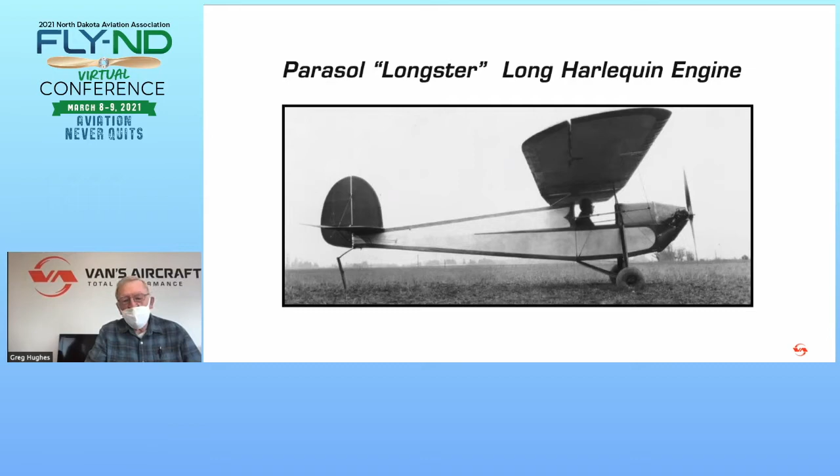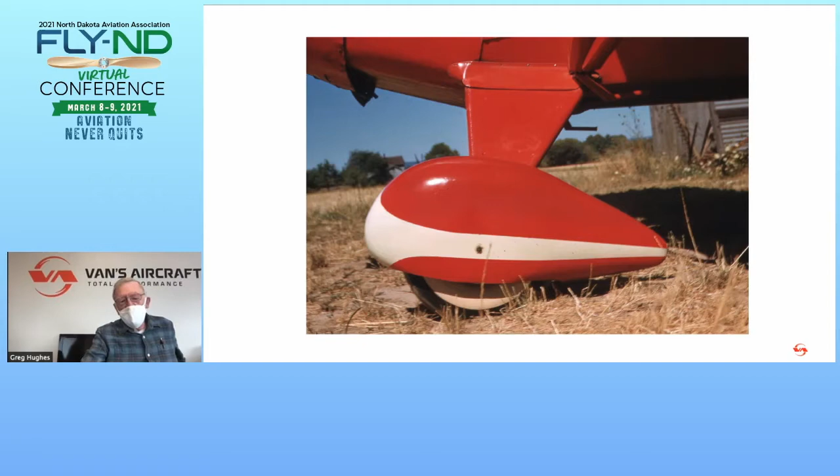The significance here, though, is that the wheel fairings are something I made a mold for, made fiberglass molds, got a supplemental type certificate on that at age 18, and started manufacturing them. I only mention that to give a little bit of background as to the entrepreneurial or engineering bent that I had. At that time, I was just starting my engineering education at the University of Portland in Oregon.

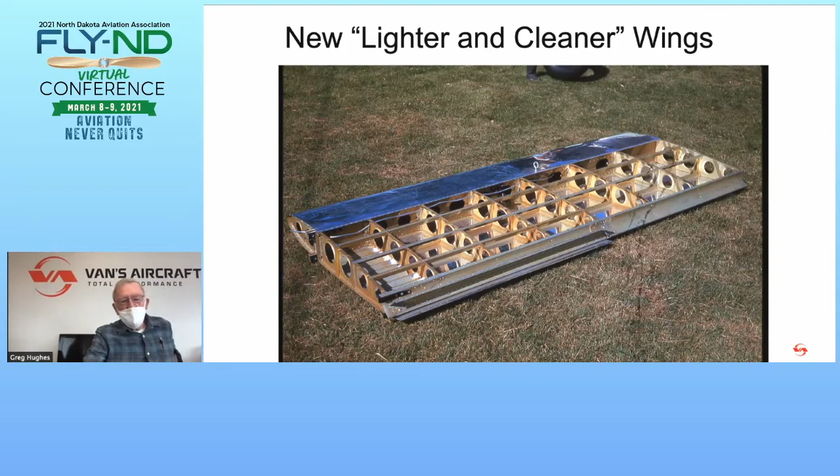1968, to get my years straight, 1968. An airline pilot in Texas wanted it real bad, so I sold it to him. That gave me an excuse to turn around and design a new airplane, the RV-3, based on that already successful airplane, but with totally aluminum, not a hybrid anymore, all aluminum wings. Basically what I had already developed, a new fuselage, tail surfaces, just overall refined.

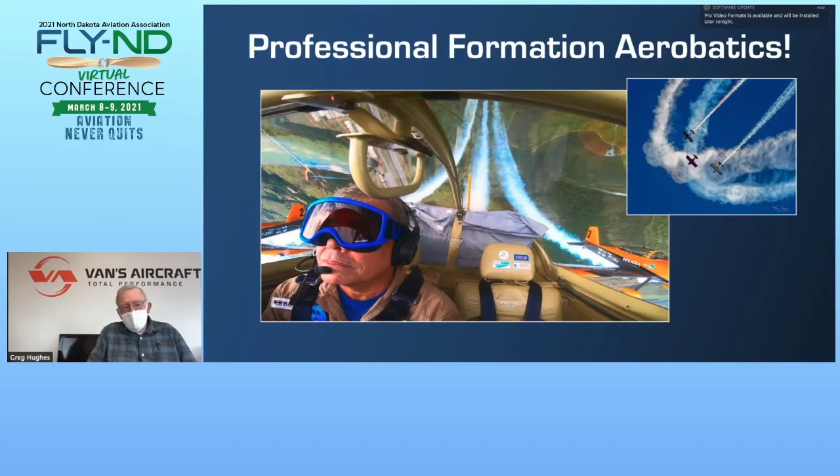As we mentioned, aerobatics and going upside down, things like formation flying, and even putting formation and aerobatics together sometimes—there are quite a few really talented teams of individuals. These pictures you're seeing are a team from South America, and they're super talented and do really amazing stuff. We're really excited and proud of the people who have taken RVs and done cool things with them. Not everybody does this, but one thing about the RV community is that it's a very passionate community of people who build and fly our airplanes.

So there are a number of basically never-ending debates that go on amongst airplane owners, especially RV owners, and one of them is tricycle versus tail gear. Another would be primer—do you prime or not prime, or which primer do you use? But what it comes down to is, it's a highly personal choice. Several of our models are available either as a conventional tail dragger gear style or as a tricycle gear airplane.

Another of the total performance characteristics that really defines RVs is that, generally speaking, they can go quite fast, but can also fly quite slow, and can both take off and land in fairly short distances. That enables folks to take their airplanes and go to short strips in Idaho, for example, or to land on a grass strip on the farm, and do those kinds of things—especially as people become more and more proficient.

And then the next one is ease of construction. How difficult is it to put together the airplane? Is it difficult, or is it relatively easy to put together, and how much time and what level of skill is required?

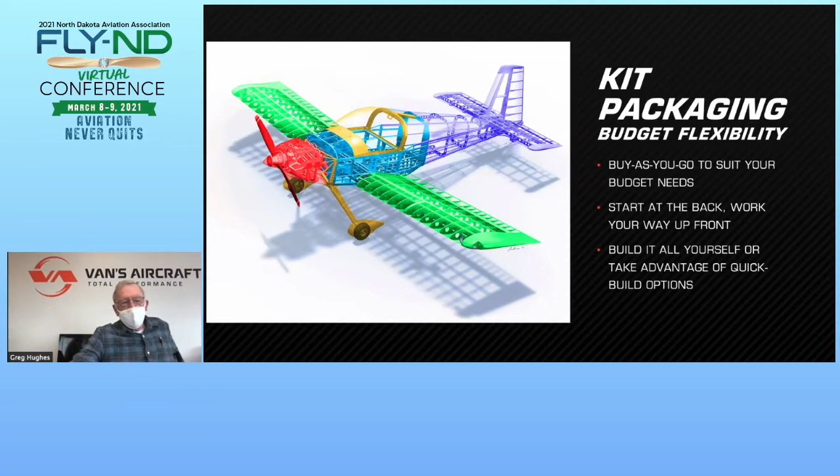It's part of the learning process, though, that you normally progress through the airframe from the tail section to the wings, to the fuselage, to the power plant. This has evolved over a lot of years and has proven to be an effective way to do it.

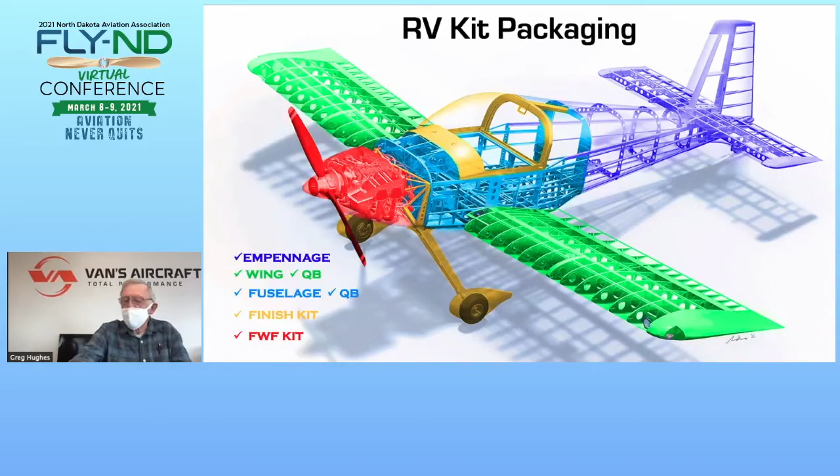With the kits being available in component sections, you don't have to pay for everything up front. You probably buy as you go, which makes a lot of sense for a home builder, since they don't always have the budget to. One reason you're home building is you don't have the budget to buy a ready-to-fly factory-built airplane anyway. So it all meshes together pretty well in concept and in realization.

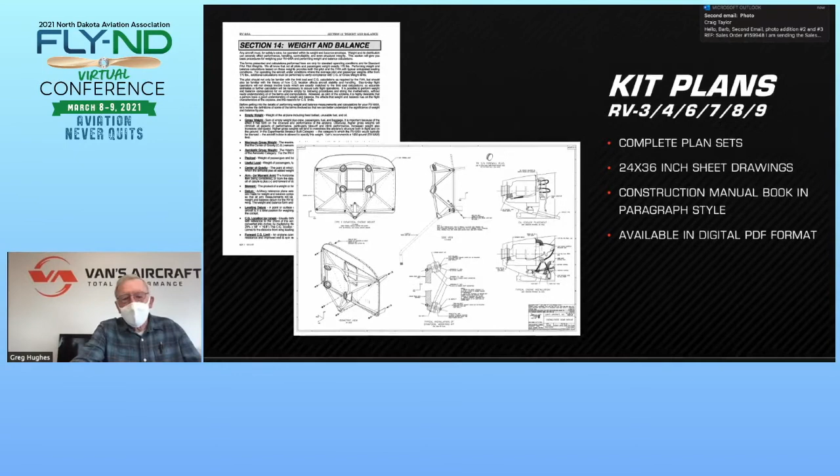Backing up to our earlier designs, the RV3, RV4, etc.—when we started, kits as we know them now didn't really exist. Most home-built airplanes were just built from blueprints or drawings and raw material. Hard to imagine now, but hey, that's the way it was. A lot of the airplanes were simpler because, working from raw material, it was difficult to do a really complex airplane. As we evolved, initially the plans I drew had to be mechanical drawings, large prints, usually 24 by 36 in size, with all the detail needed to build the airplane from raw material if you chose.

Very soon after starting to market the airplane, initially the single-seat RV3, we developed a kit package that had some of the components and basically all of the material and hardware necessary to do it, but the drawings still had to be very detailed so the builder could work from the basic kit.

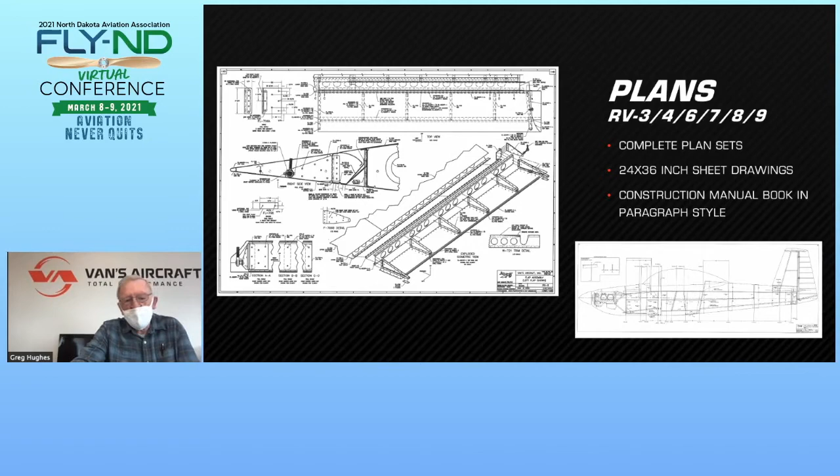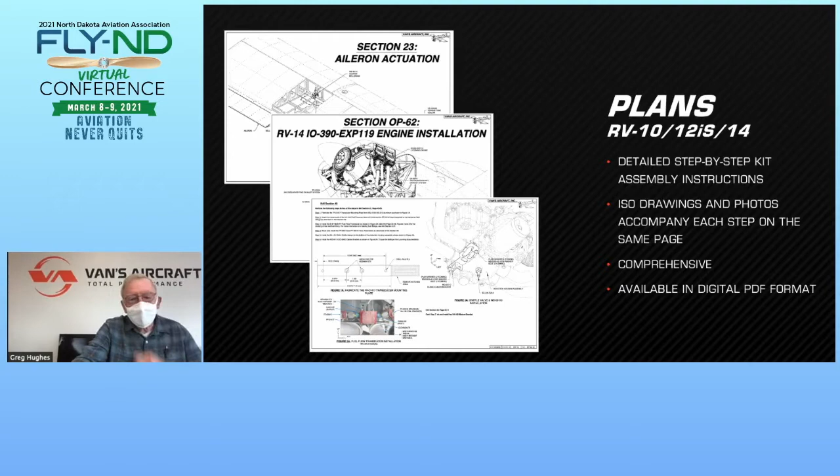The plans have evolved over time as the kits have evolved, in that the current kits have most of the components completely built. So it's more a matter of assembly than construction, as it had been many years ago. Therefore, the plans have evolved to the point that they're more assembly drawings, without all of the detail and intricate dimensions necessary before.

And a lot more detail. Initially, things like the throttle assemblies were kind of left up to the builder because he was sourcing, in many cases, from salvage yards and what have you. Now, every component down through all of the engine controls, et cetera, is provided with a kit. So we have very complete drawings showing all of the detail so that we can ensure more consistency on all of the vital components.

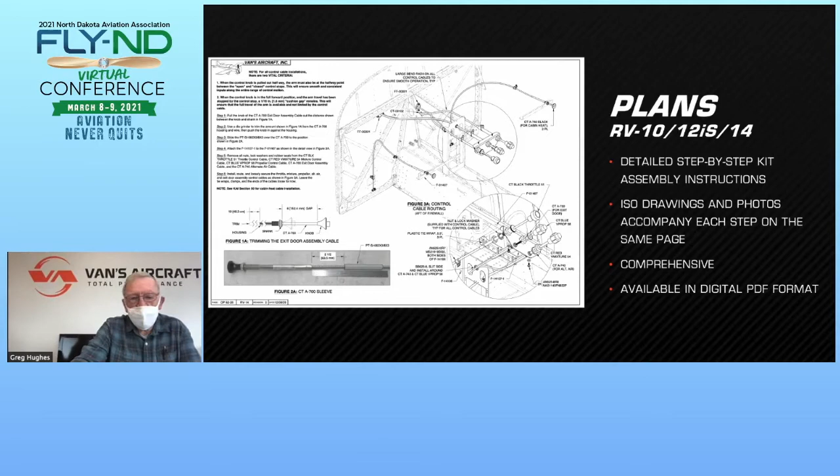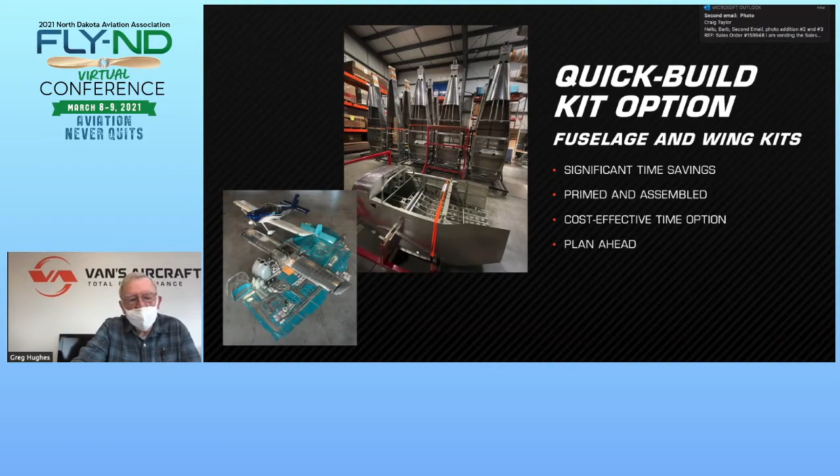Over time, the industry has evolved to the point that, meeting customer demand, the kits have become more complete, to the point that some pre-assembly is done as much as is permitted under FAA rules to comply with the major portion required for amateur-built licensing.

So we have what we call the quick build kit, which in the lower photograph shows the quick build versus the standard kit. The upper drawing, in this case for the RV-7, is pretty typical of all of our planes though, showing all of the individual components as they're manufactured and supplied. Then in the quick build kit, some of the assembly has been done, again up to about the maximum permitted by FAA rules.

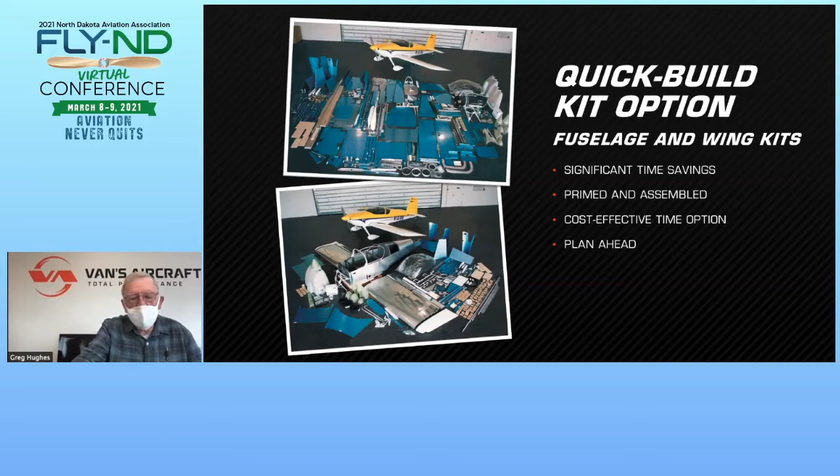The other thing is that Van's Aircraft has evolved to providing builder support. Obviously good kits and good instructions are important, but building an airplane is a big job. I don't care how simple the airplane is or how good the kit is.

A lot of times I like to compare it to an aircraft factory, where the builder is really performing all of the work that the entire assembly staff at Cessna might be doing. So it's unreasonable to think this person is going to be able to work through this process without some questions and some assistance.

So we have several people on staff here at Van's who, via email or telephone, can answer questions and help people over the little challenges they have. The people we have on staff for that are all pilots, and in most cases have built their own airplanes, so they're well qualified to offer this sort of help.

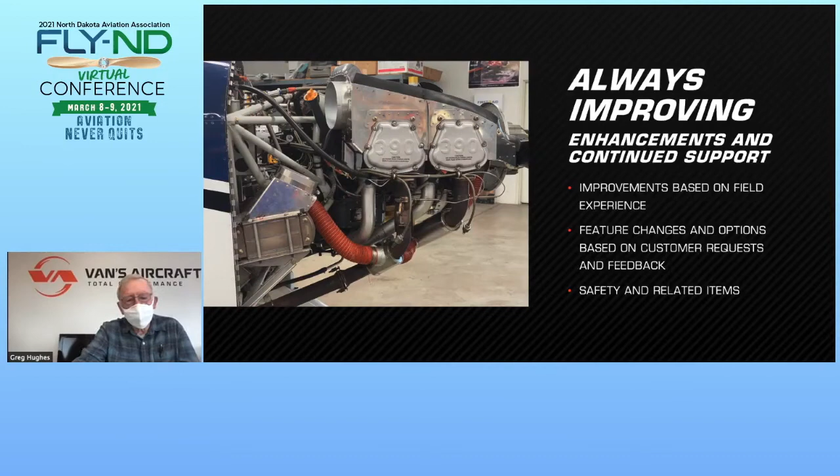And the other thing is, even though we may have had a kit on the market or online for a number of years, we are constantly upgrading as the opportunities present themselves, or as we become aware of ways of making improvements.

So again, over that almost 50-year period of time, we've created a line of aircraft. We'll kind of go through now how some of this evolution came about. We started out with a single-seat RV-3.

I explained a little bit in the introduction how that came to be. Primarily it was an airplane for myself that met, as much as possible, my desires in an airplane, which were pretty broad. Obviously I wanted a fast airplane for cross country, was really into aerobatics, had a background flying from short strips on the farm, being able to literally keep the airplane at home. A lot of desirable features that I wanted, incorporated as well as possible into this airplane.

At that time, a lot of the home builds leading up to that had been single seat. So even though single seat is now kind of the exception, it was a reasonable starting point, both to keep the costs down and to keep the assembly and building time down, etc.

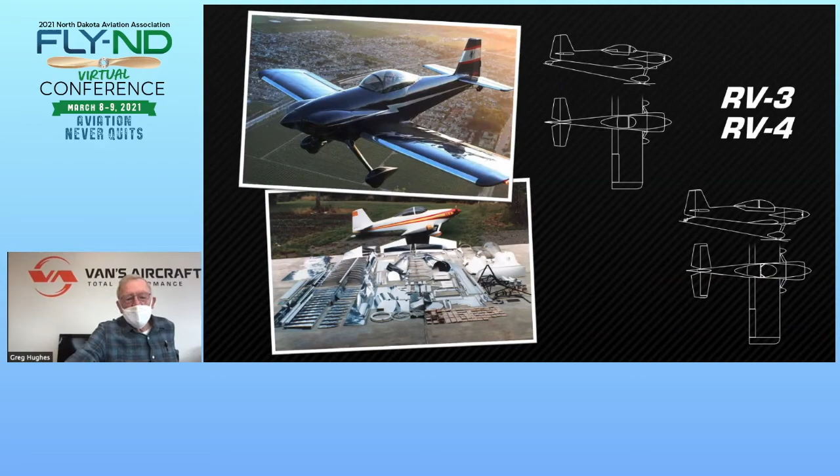But at some point in the mid-70s, I started developing a two-seat RV-4. You can see the similarity between the two. And it just made sense that if we knew what worked, we didn't stray too far from that. We made the two-seat as much of an expansion of its smaller predecessor.

Fortunately, as mentioned before in the case of the RV-3, we had to provide construction drawings for the airplane that had all of the detail necessary to build from raw material if desired, or from the basics that were provided with the kit.

And that was pretty well true through the period that we had offered the RV-4. The two-place, by the way, became much more popular than the single seat, which again probably is understandable. But that brings us into the early 1980s.

As soon as we had that, a lot of people wanted side by side. I had chosen the tandem configuration for the two-seat because I felt I could make the lightest airplane that way, the cleanest, lowest drag, and get the maximum performance. I was concerned that with a side-by-side airplane, at least some examples available at that time didn't really have the overall performance capability. Felt there'd be too much sportiness and ultimate performance lost.

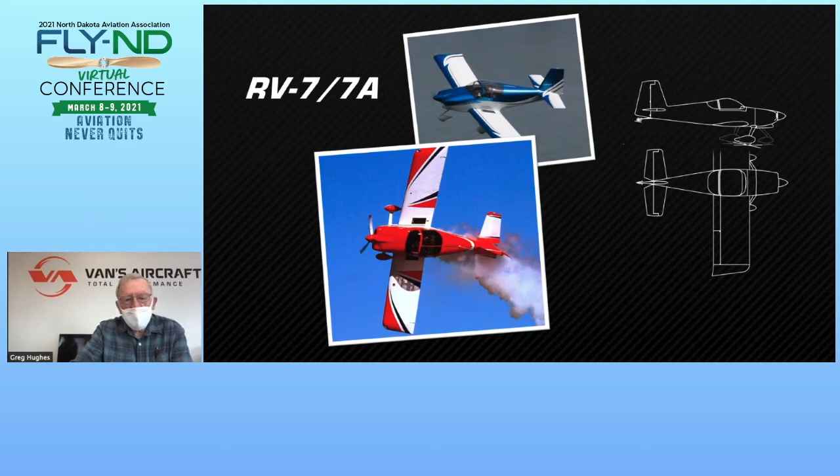Eventually we had really great success with the RV6, but as time moved on and we were able to make upgrades and other proposed upgrades, we developed the RV7, which was overall a very similar configuration, very similar in size, but offered a little more of everything really - a little more horsepower, a higher horsepower option, a little more fuel, which gives you more range.

But primarily, we were making upgrades in the design, the actual construction of the airplane, or the kits themselves. We were able to manufacture components to a more complete degree, making it easier to assemble the airplane. So we created a new designation rather than just an altered designation.

The RV7 was really the first kit we had that offered what is now commonplace for all of our newer designs, which is matched hole construction. All of the pieces with rivet holes, attached holes, already in place, so that it really became more a function of assembling the airplane than fabricating, as it had been in earlier days. So this is really what set a new course for our company, and the 7 was the first model.

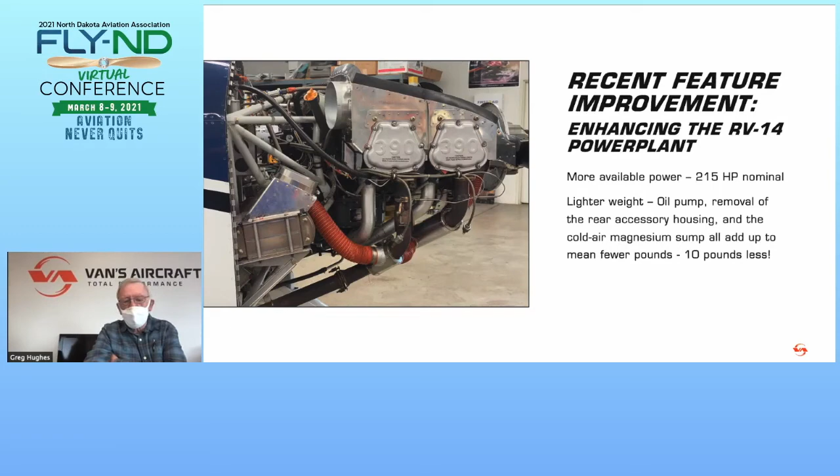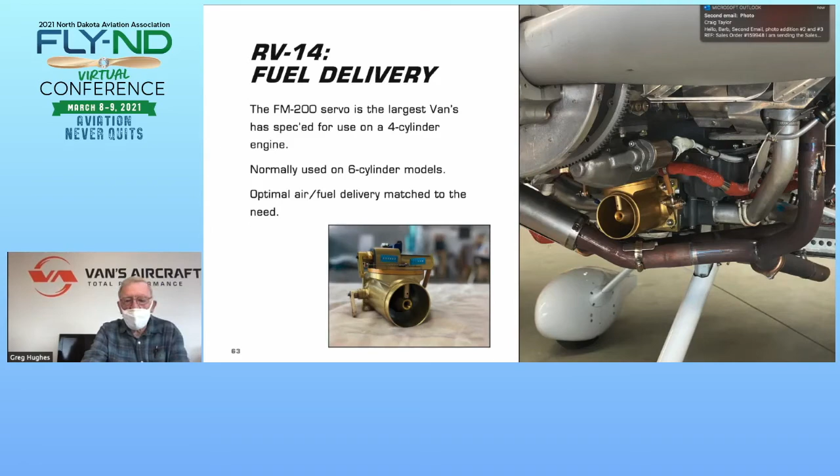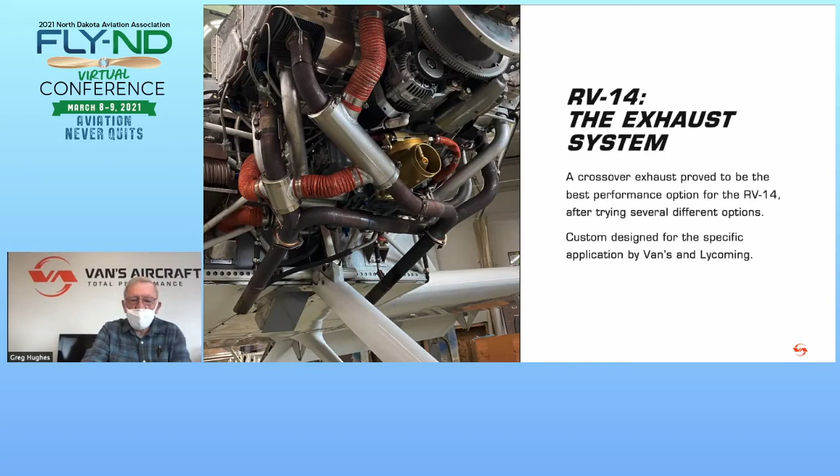Just more detail on getting the performance out of the engine was the incorporation of a little larger air body for the fuel injection system, which permitted the engine to breathe a little better and develop a little more power. Exhaust system, that's part of the engine breathing formula. Air's got to come in and go back out, and you make that whole process as efficient as possible. The engine cowling is part of the formula also, because you've got to move cooling air around that engine, and it takes energy to do that. The better that can be managed, the lower the drag, and thus the higher the performance.

Overall, our engineering team really excelled in this - not an experiment, but this - in that we picked up about 13 miles an hour in speed. Speed is hard to come by in the real world. I should pick on Greg as an advertising guy, that it's easy to come by speed - you just sharpen your pencil - but in the real world...

To gain 13 miles an hour on this airplane, if you did it with horsepower alone, it would take around 50 horsepower to gain that speed. The engine, we only had 5 horsepower more specified. Real world, we got more than a 5 horsepower boost with that installation. But a lot of the benefit there was refinement in the other details I just mentioned, the engine cooling.

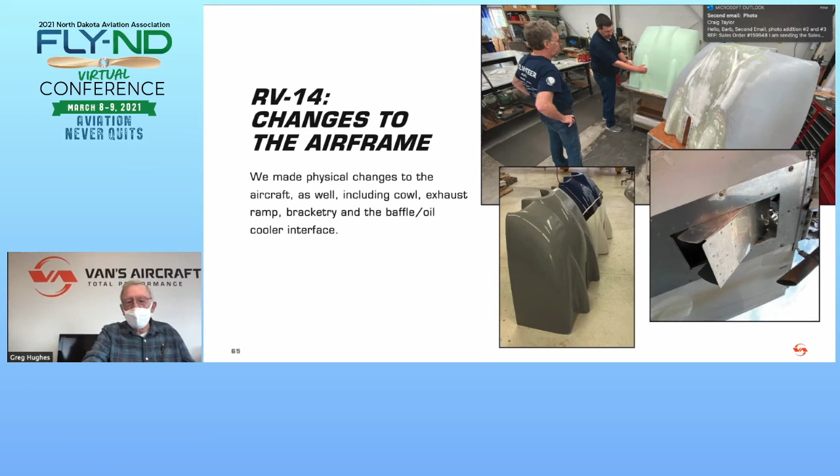This drawing shows a cowl flap down in the lower right. That is a cooling flap, incorporated in a cooling tunnel in the fuselage, not just a flap on the cowling as is often seen. That can be closed in flight to reduce the drag and achieve the speed gain that we found possible.

Oil cooling changes and improvements were made to keep this high output engine cool.

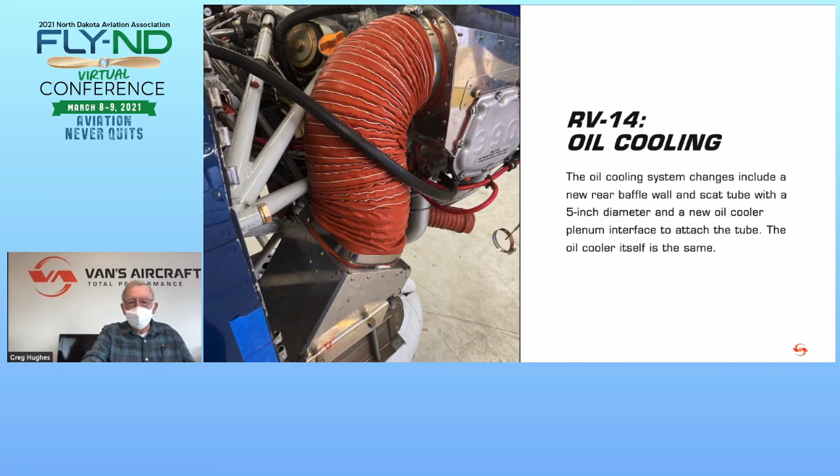The future of Van's, well, who knows? We just keep doing what we have evolved over the years and improving upon it. We had achieved matched hole tooling and assembly some years ago, but we continue to upgrade that and make it even easier. We got it so accurate that we end up now with final sized holes, not just approximations that have to be reamed to final fit. And so accurate with final size holes that if you ordered a part on an RV-14 four years ago and wanted to replace that part today, the one we'd ship you today would fit exactly.

Going back personally to my design and manufacturing experience almost 50 years ago, I can't keep up with all of this. It's the young engineers, I've just had to stand back and let them do their thing with all the magic tools they have available now. But we will continue to work with that, both from design and manufacturing perspectives, to just make the best product available.

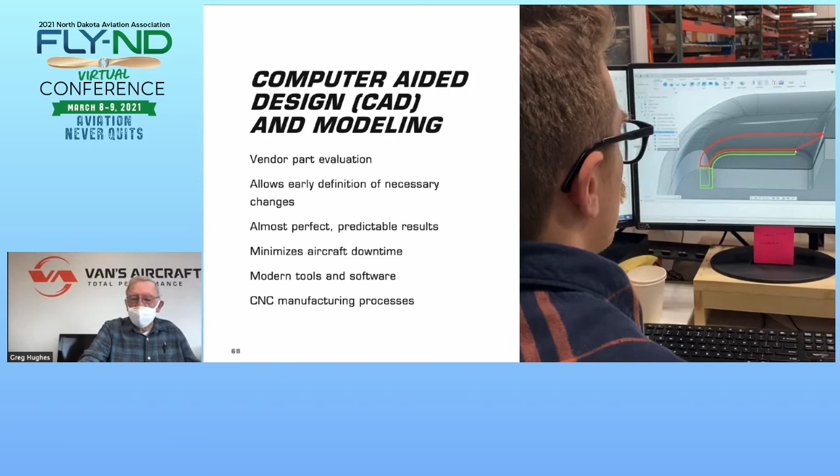This has always been a factor on home-built aircraft. Coming up with a final product that performs well is only part of it. The big part is that it has to be something a reasonable person in the field can build. So it really is a bigger challenge than designing a good airplane to design a good kit.

An example here is the cowling I made reference to before. With the accuracy they're able to achieve in the development of the tooling for that, it just makes it work. Often on cowlings and set pieces there's a lot of cut and fit necessary, and we've minimized that to the benefit of the builder, because not only does it take time, but it's often frustrating. If you're cutting and fitting fiberglass pieces of a cowl, you can overdo it. So all of this is taking as much of the guesswork out of the process as possible.

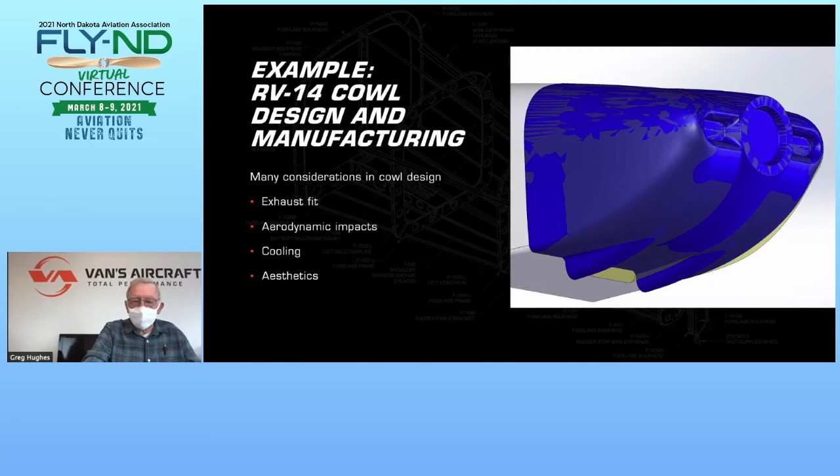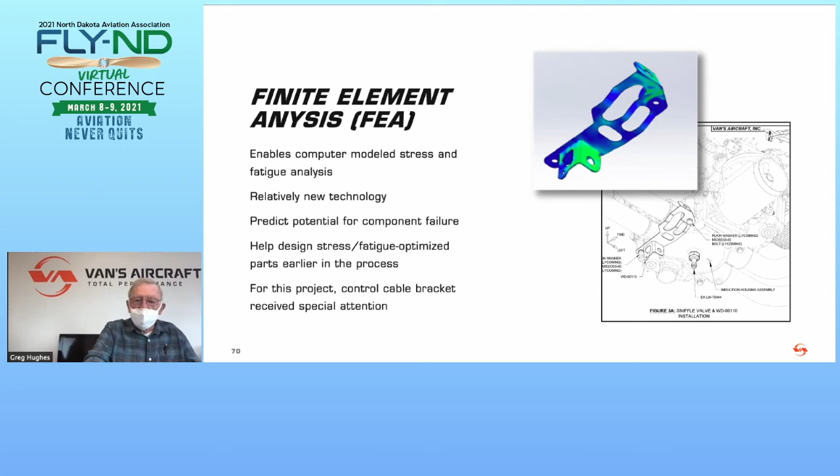Another new tool is finite element analysis. From the engineering standpoint, the computer sees this stuff in 3 dimensions. You can input known forces and loads, and in the computer you can see this part actually bending and moving as it would in service. So you can see where the high stress areas are. We're able to use this to manufacture parts that are going to hold up over time and give the consistent strength that we need.

The RV-14 in this case has really been designed to FAR Part 23 standards, the same standards as manufactured airplanes. We don't have Part 23 certification because designing and testing to that is one thing, convincing the FAA is another, a very expensive, time-consuming process.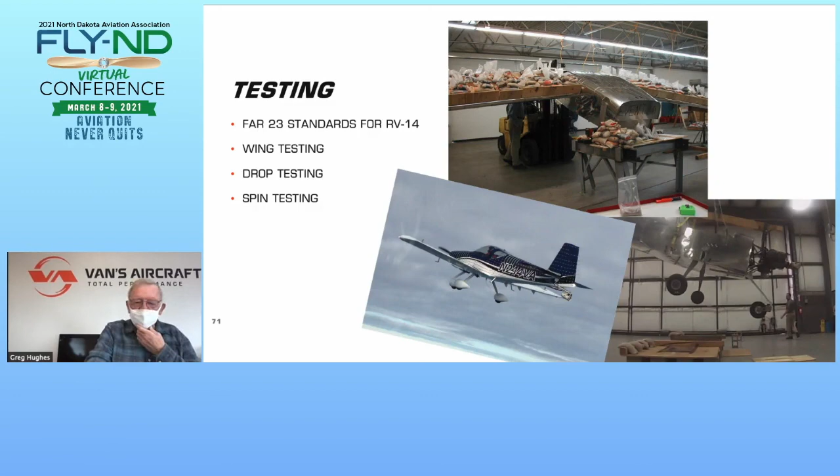So I have a question coming in from Mike, and he asks, does Van's Aircraft have any educational programs available for EAA chapters, schools, etc., to get students building components as a way of introducing aircraft maintenance and engineering to students?

Van's Aircraft doesn't have anything specific to that. There may be something, such a program is really pretty involved. We have been involved, I personally have been involved.

We initiated a project here about 10 years ago, along with the RV-12 Light Sport, which is the best product we have for entry-level builders. We started a project working with high school kids along with a local nonprofit, aviation education related nonprofit, building a complete RV-12 with a volunteer group of high school kids. We're finishing our 6th airplane right now with that many successive classes. This concept has been copied by quite a number of other groups around the country, so it's pretty successful.